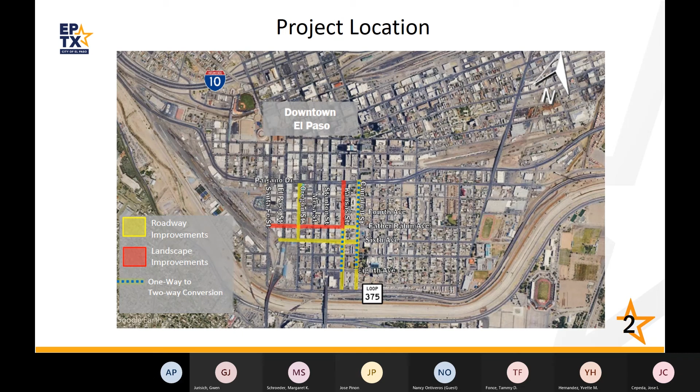The limits of the project include 5 streets: reconstruction on Campbell from Paisano to Loop 375, Kansas from Paisano to Loop 375, Oregon from Paisano to 6th Street, Father Rahm from Santa Fe to Campbell, and 6th Avenue from El Paso to Campbell.

The proposed project will consist of roadway reconstruction, parkway improvements including sidewalks, storm sewers, curbs and gutters, ADA improvements, bicycle improvements, driveways, traffic signals, lighting, signing and striping, landscaping and irrigation on Campbell, Kansas, Oregon, Father Rahm, and 6th Avenue.

Improvements on Campbell Street from Paisano Drive to 8th Avenue and Kansas from Father Rahm to 8th Avenue will also include the reconfiguration from 3 one-way lanes to 2 two-way travel lanes.

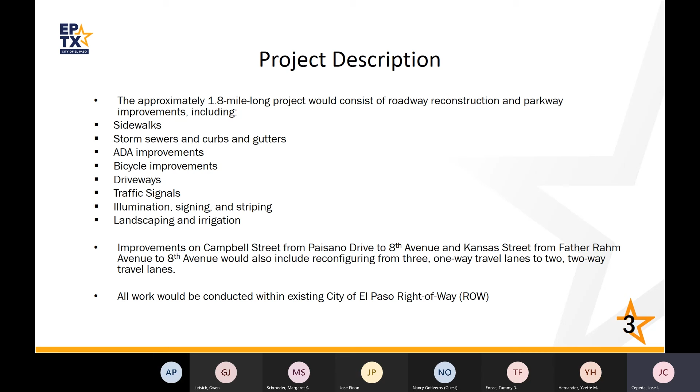The total project length is approximately 1.8 miles, and the proposed improvement will take place within City of El Paso right-of-way. No right-of-way acquisition is needed for this project.

This slide depicts the existing typical cross-sections along Campbell, including 3 northbound one-way travel lanes with variable parking and parkway on both sides of the roadway.

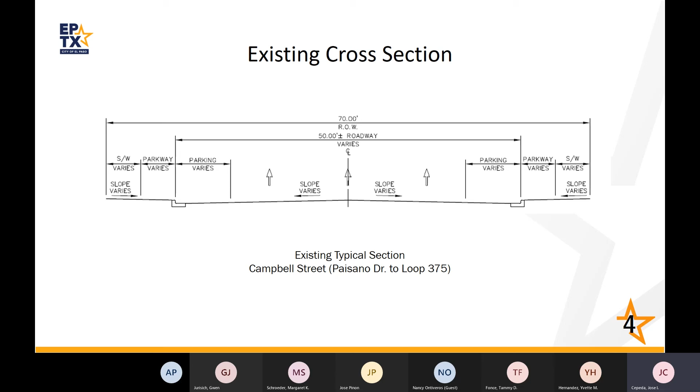This slide depicts the proposed typical cross-section along Campbell Street. This includes 1 travel lane in each direction, parking areas, landscape, parkways, cycle tracks and sidewalks, illumination, and the proposed improvements will also include traffic signal improvements at Campbell Street and Paisano Drive intersection.

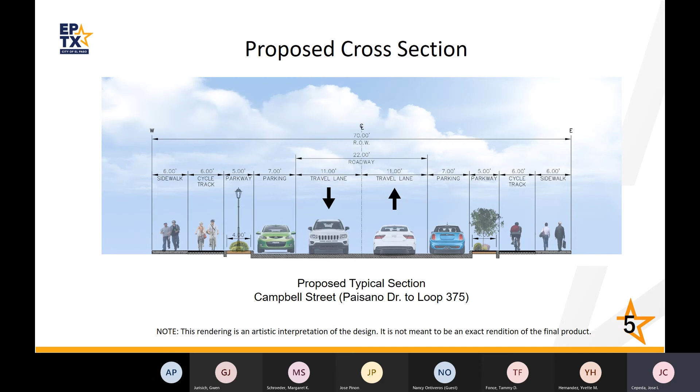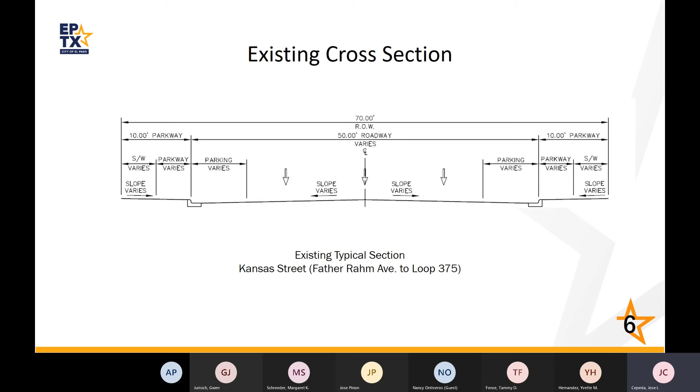This slide depicts the existing typical cross-sections along Kansas Street, including 3 southbound one-way travel lanes with variable parking and parkway on both sides of the road.

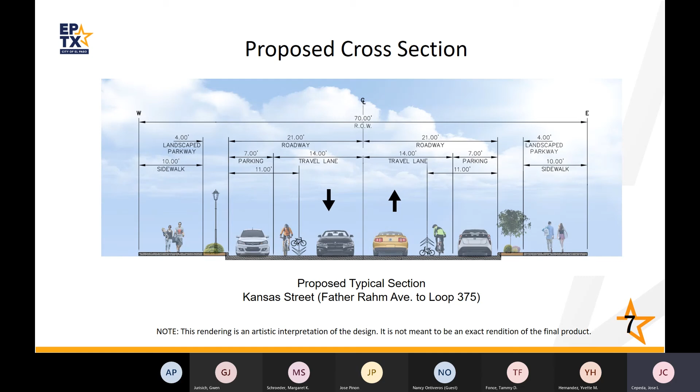This slide depicts the typical cross-sections along Kansas. This includes 1 travel lane in each direction with a shared use bicycle striping on the road, parking areas, landscape, parkways, and sidewalks.

We're now on Oregon, and this slide depicts the existing typical cross-section along Oregon, including 2 travel lanes with variable parking and parkway on both sides of the road.

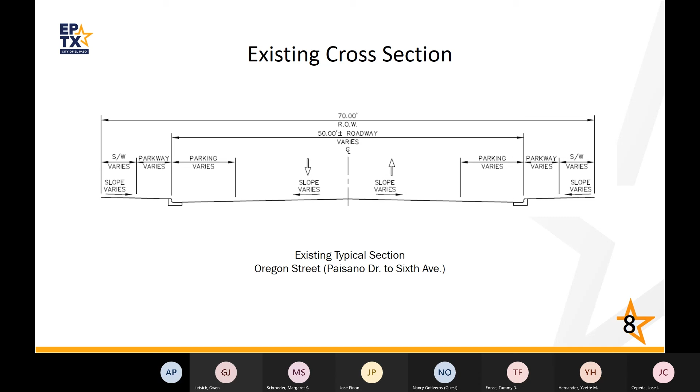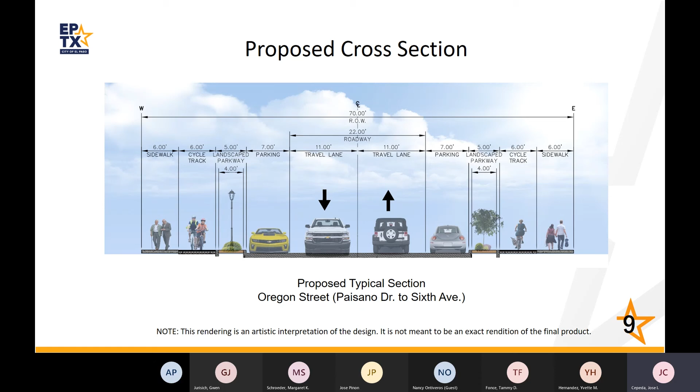This slide depicts the typical cross-section along Oregon, and for this one, we are including 1 travel lane in each direction, parking areas, landscape parkways, cycle tracks, and sidewalks.

For Father Rahm, existing cross-section, we have 2 travel lanes with variable diagonal parking and parkway on both sides of the road.

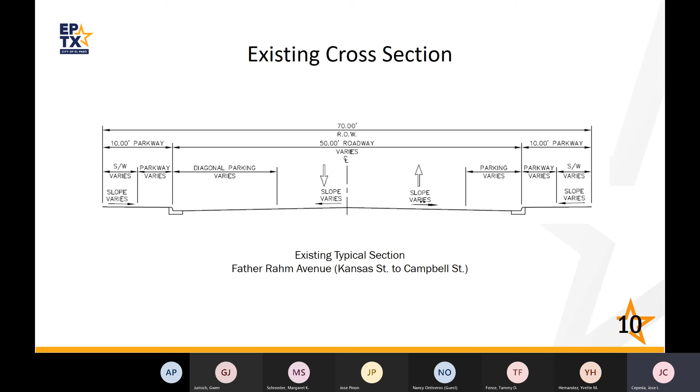This slide depicts the proposed typical sections on Father Rahm. This includes 1 travel lane in each direction, parking areas, landscape parkways, and sidewalks.

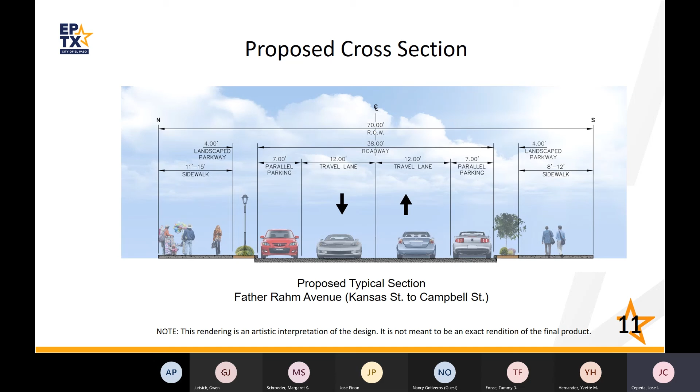This slide depicts the existing typical cross-sections along 6th Avenue, including 2 travel lanes with variable parking and parkways on both sides of the road.

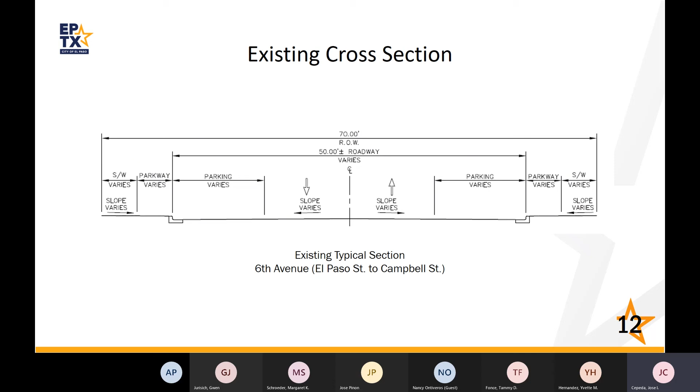This slide depicts the proposed typical cross-sections along 6th Avenue. This includes 1 travel lane in each direction, parking areas, landscape parkways, cycle tracks, and sidewalks.

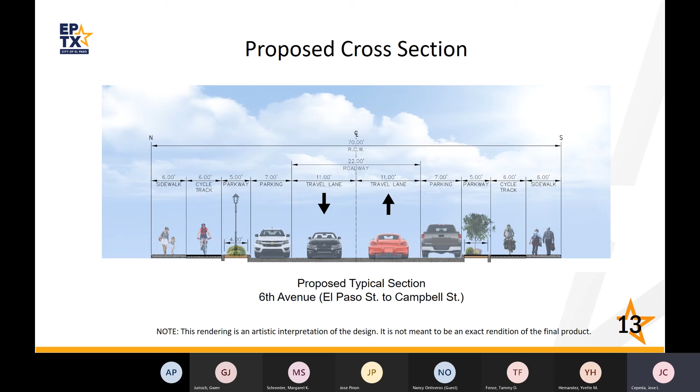Now, as part of the improvements of this project, one thing we wanted to share with the public is that there's going to be some impacts on the existing parking. So we're going to go over the different streets and bring to your attention the parking losses that we're going to see after the project is completed.

Along Campbell, we have a total of 14 spaces lost, between Paisano and 375.

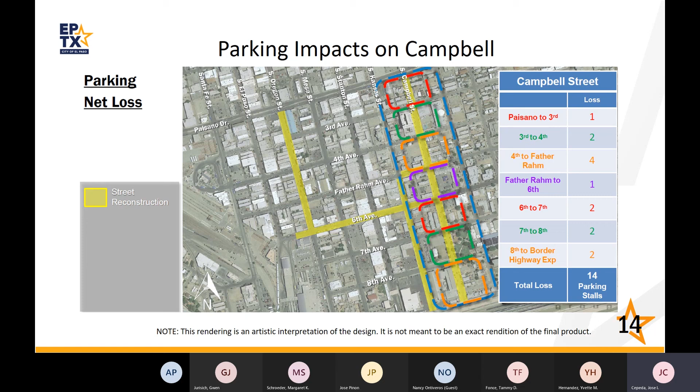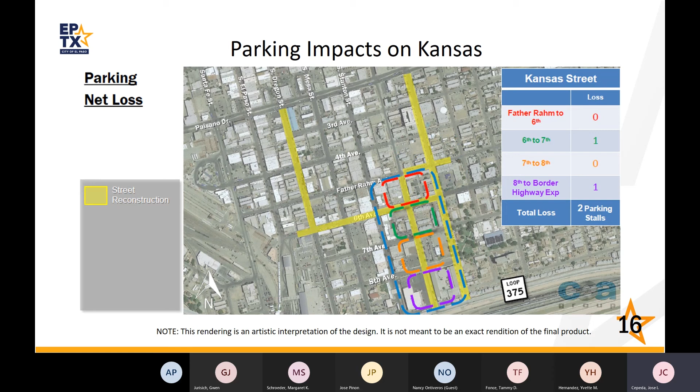Along Father Rahm, between Campbell and Kansas, we're going to be losing 9 spaces. On Kansas, between Father Rahm and 375, we're going to be losing 2 spaces.

On Oregon, between Paisano and 6th Avenue, we are going to be losing 8 spaces. And finally, on 6th Avenue, between El Paso Street and Campbell, we are going to be losing 46 spaces.

Now, we do have a breakdown of these losses because this is the street where we're going to be losing more spaces. We are going to be losing 4 spaces for taxi drivers, which we're going to be relocating. Decal spaces, we're going to be losing 13 spaces, which we are going to be relocating. Existing non-metered, we're going to be losing 3 spaces. And the rest are metered spaces throughout the corridor.

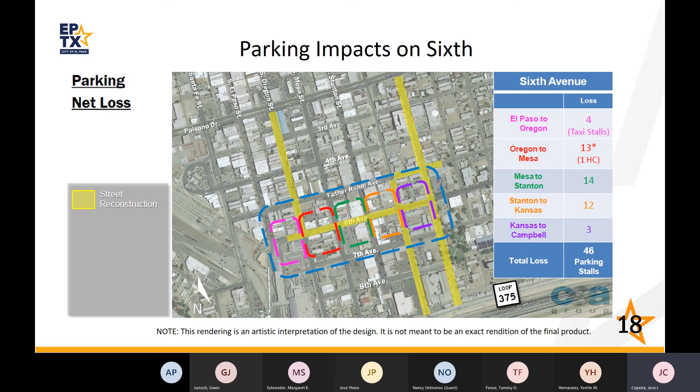Total estimated cost for construction is $12.75 million. This includes all 5 streets, and we do have sanitary sewer, water, and stormwater improvements throughout the corridors. Funding source is federal, state, and local funds.

During construction, vehicular and pedestrian detours will be provided. Contractor will maintain access to all residents and businesses.

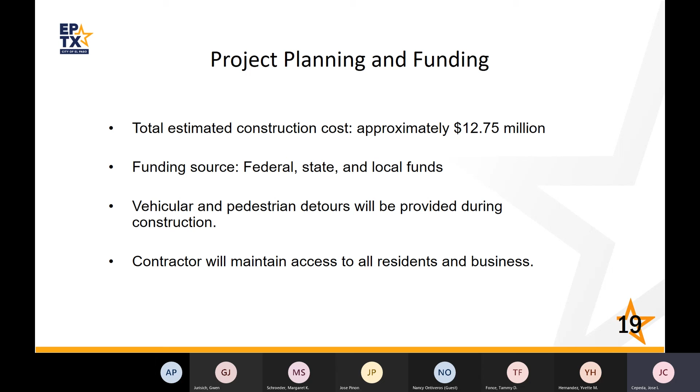A virtual public hearing was performed on July 23rd of 2020 through August 7, 2020. Today we're having a public meeting, and the beginning of construction is September 7th of 2021. The total estimate for construction time is 2 years.

And that concludes the presentation. We're open for any questions. Not hearing any immediate questions right now, I'm just wanting to...

Provide additional feedback that the City of El Paso will make sure to coordinate with CBA, CBP. There's quite a few stakeholders involved with this downtown project, so we want to make sure the community is aware that we will be in constant communication with them, and also to include the DMD. Just wanted to provide that additional information for the benefit of those participating and who have also referenced back to this presentation.

So like I said, really excited to start this project. City of El Paso will make sure to be involved. As with any project in construction, there will be moments of inconvenience, but we really want to communicate to our community at large that downtown is not just those directly living there or owning a business, but everyone within the city of El Paso that does travel to the downtown area, that we will be working closely with our community to ensure access is provided, and that we are communicating the different phases of this project.